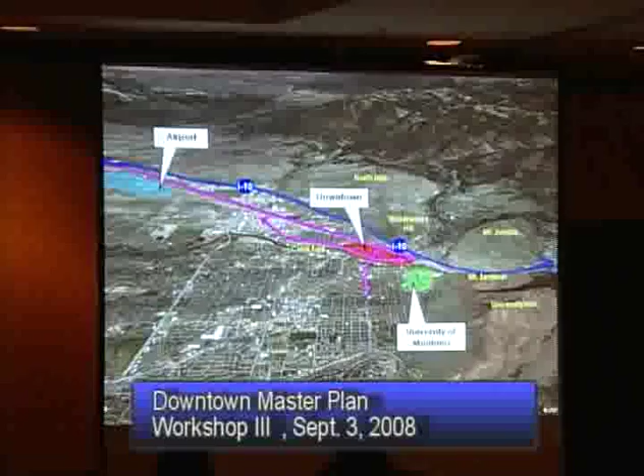The meeting purpose tonight is to look at plan refinements and get your thinking about those refinements. The agenda is pretty straightforward: the presentation and then the discussion. The discussion, I think, is the most interesting part of the meeting, and we will then have you fill out response sheets and make table reports as you've done before.

A reminder: the planning process has 3 steps - starting, designing, implementing - going from the general to the very specific. Looking at the schedule, here we are tonight looking at plan refinements. There will be one more meeting in November, where we'll be talking about the final master plan and the implementation strategy.

Our firm is out of Portland, Oregon. We're a small firm, and this is what we do, this is our specialty. We work around the country. We get good reviews and bad reviews, and we only save the good ones, and here they are.

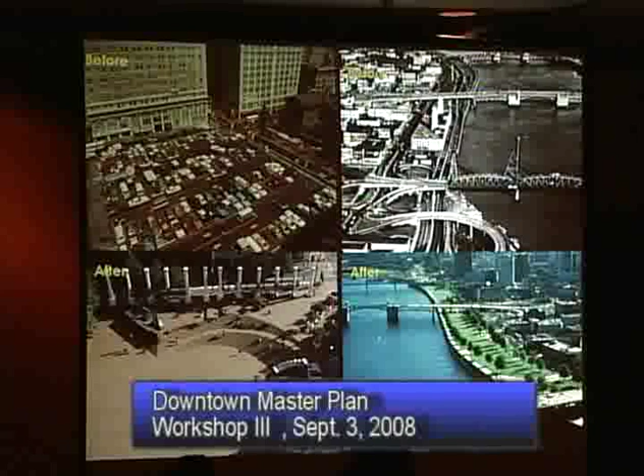So we've learned - we've had successes and we've had failures. On the left, a before and an after: a parking lot turned public square, and a waterfront that had a roadway which is now a waterfront park.

Meeting 1, the reminder: back in March, the question was - and many of you attended - what are your issues and concerns? Those issues and concerns are driving the process. For example, 70 people said maintain and expand a mix of retail.

41 said the next one, and you can see. So this informed us about what it was you wanted us to address, and that has been driving the planning process forward.

And then you can see some circulation alternatives, circulation issues as well. It doesn't mean that this prioritized the objectives - the ones with the most time mentioned are important, of course, but everything was important, and we're trying to address everything you mentioned.

Meeting 2 then was in May. At that time, we said here's some alternatives, and we asked, what about a retail hotspot? You filled out your response sheet, and you can see 186 yes, 3 no.

And how about open space? The Depot Square Roundhouse Park, as we called it, again a positive response. Festival waterfront, and a positive response as well.

Now, the reason these become important is that we want to know what everyone is thinking in the session. If something gets a negative vote, we take it off the table. Or if it's a 50-50, we know that maybe it ought to come off the table, or we need to do more work on it. So this informs us about where you are, because in the end, it's your plan.

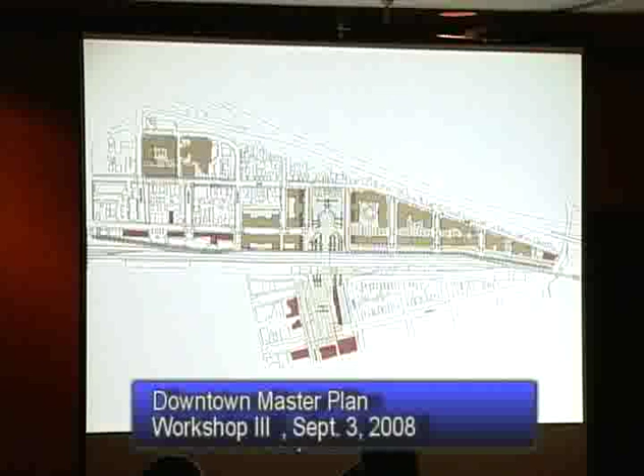As far as housing in the downtown, a neighborhood protection zone, again positive. Rail yard housing, if the rail yard should redevelop at some time in the future, again positive. That seems like a stretch, but there it is.

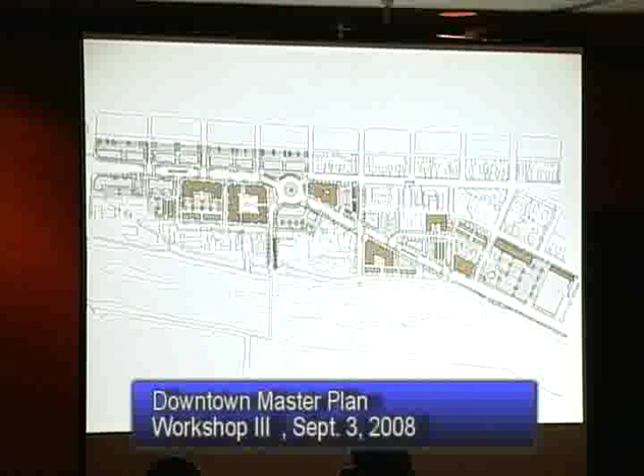Triangle housing - and of course you've been looking at the triangle for some time, with lots of good concepts, but we had some refinements, and you said yes on that. West Broadway housing, again a positive vote.

By the way, when we get a no, we take a look at the no's, and we also look at comments, because those sheets have places for comments. So you've informed us about many issues, or some of you had other suggestions, and we try to incorporate those. We take these very seriously.

As far as employment, the Triangle Employment Anchor, you said yes - it's up by the hospital. On the East Madison Employment Anchor, again a positive response, employment on the west, and employment in the middle at the government center, the consolidation of county and city functions. There was a positive response for that.

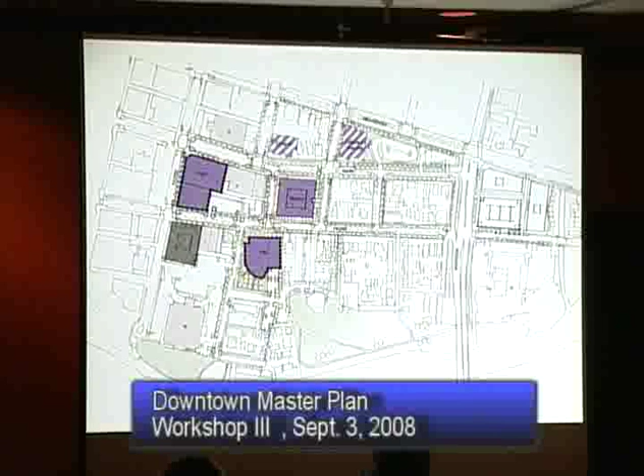As far as the cultural campus, we said perhaps there's a place for the Performing Arts Center down by the library off in front, and other cultural activities, and that received a positive response as well. But you had some questions about that.

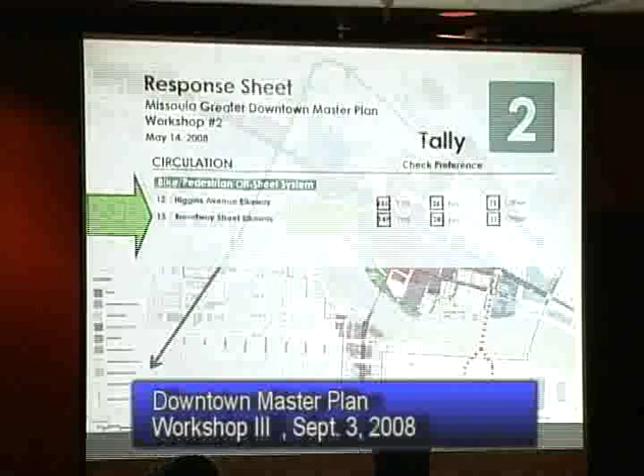Higgins and Broadway Bikeway had a positive response, as did Higgins and Broadway, so we carried those forward. We suggested a streetcar at a later phase running on rails in a fixed alignment with traffic, and generally you said yes, though there were some doubters. This is a long-term strategy, and since we've begun, energy costs have gone up, so it's starting to look even better.

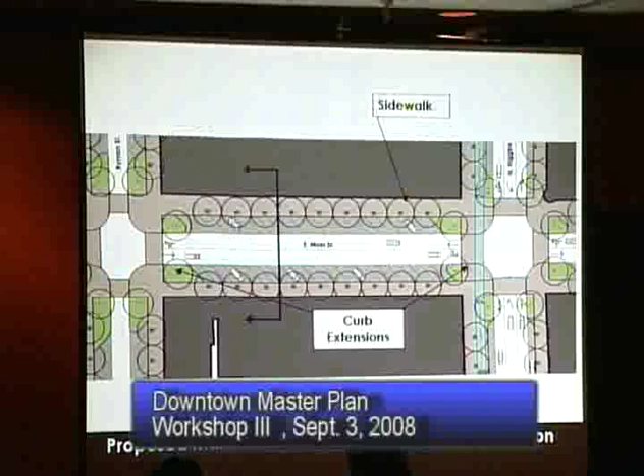As far as streetcar phase 2 running to the university, again not a lot of enthusiasm, but it received a positive vote. Making Main two-way from one-way was very positive, and Front two-way from one-way was also very positive. You've been talking about making them two-way for some time in the community, and this was just an affirmation of that.

So here we are at meeting number 3 with the refinements. We've taken your responses and comments, had discussions with your steering committee, technical advisory committee, and with your leadership, and out of that have come these refinements. So Don, do you want to talk about these refined alternatives?

So we're going to switch on and off to keep you awake here. Okay, Don, first of our tag team efforts here. So I'm going to start it out and do 30, 40 slides and give it back to George.

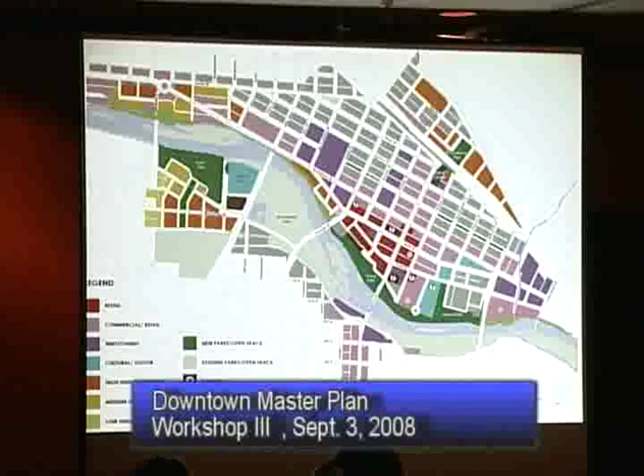When we did that, we were able to assess what that would be at build out. These may be abstract numbers for some of you, but I can say it is fairly consistent with your previous growth projections. Maybe not exactly, but we think it's still in the ballpark of what was anticipated.

For your downtown, for example, in your transportation plan. So the next question has to deal with retail specifically, the Macy's anchor and Pattee garage structure. Those are key components we heard last time to creating a healthy retail corridor. So we start with the retail hotspot, indicated by the yellow line from Broadway down towards the waterfront and over to Orange to Pattee.

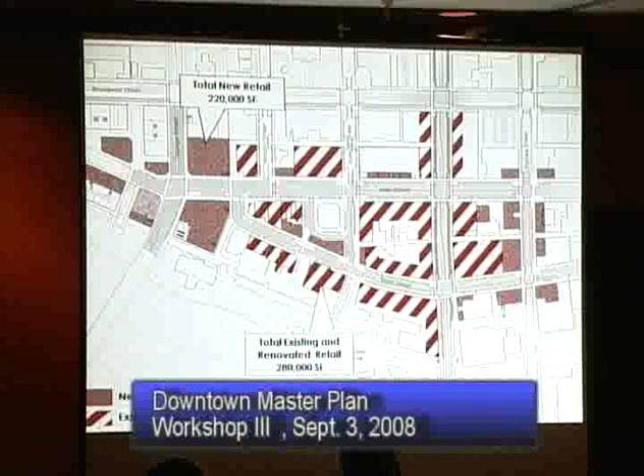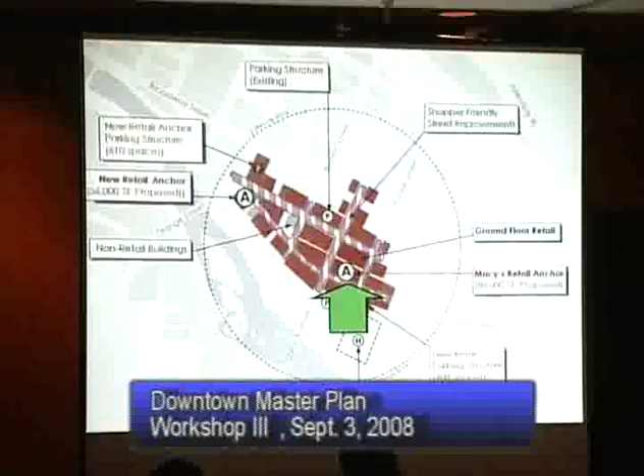We see Macy's, again, as the primary retail anchor, with the existing building expanded. Here's a before and after image of the site. You see some of those uses around Macy's, including the First Interstate Bank, a parking garage, and possible hotel. Here's a view looking south to north of what that might look like.

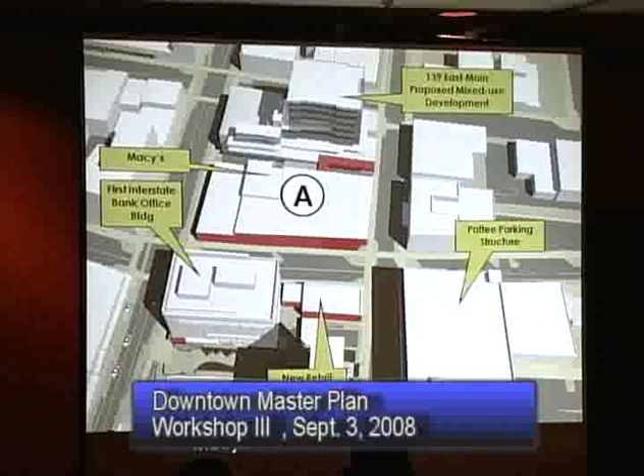On Main Street, the 139 East Main Street mixed-use project, the Macy's where you see the A, the half-constructed First Interstate Bank office building, and some new retail, all complemented by the Pattee parking structure on the lower right-hand corner. Looking at that in plan again, here are all those uses that I described.

Apologize about this. Here's what that was on the ground floor, and here's what that might look like on an upper floor. So you've got ground floor active uses along the streets, and above it you'd have a parking structure.

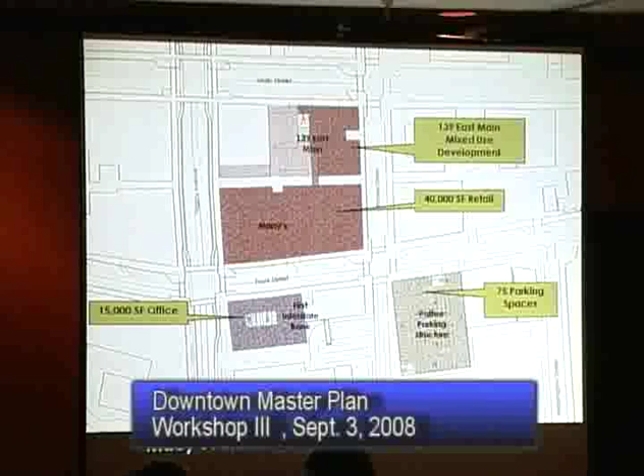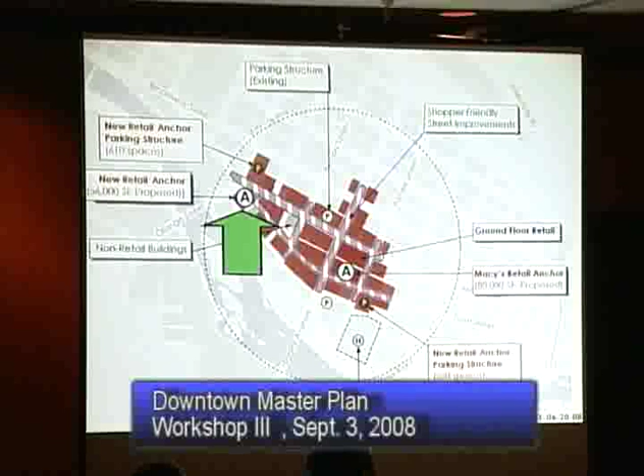Also within the retail hotspot, we're suggesting a second anchor at the intersection of Orange and Main Street, where you see that A on the lower corner. Here it is today. To do that, we're suggesting that Front Street would now tee in to Main, where you see that little dog leg. It would give us the ability to get a larger footprint and a larger floor plate to support that retail anchor.

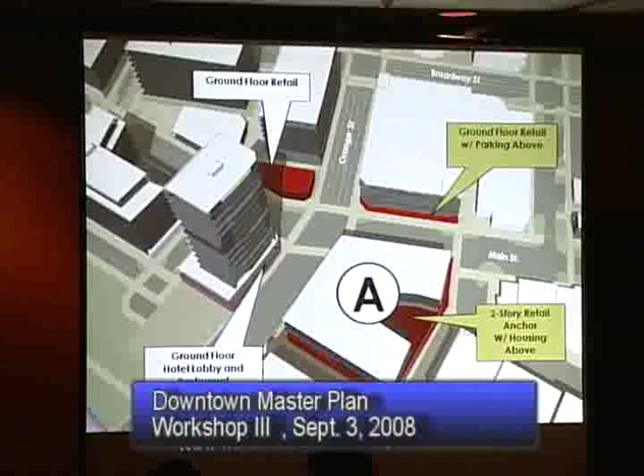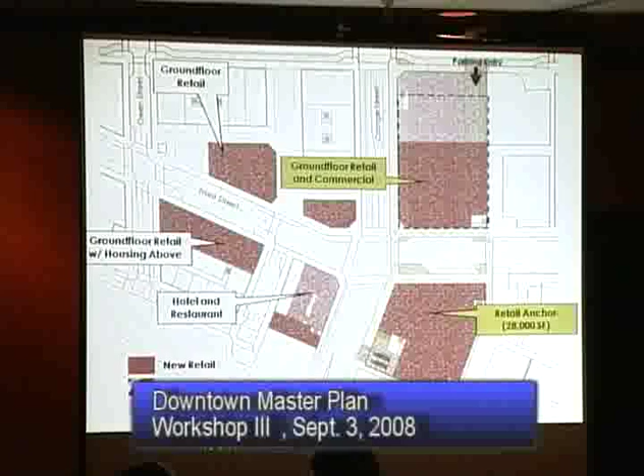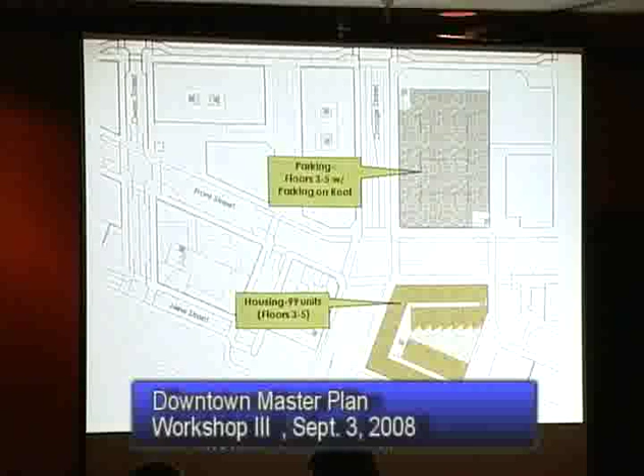Looking south to north again, up towards Orange Street, you see that area, with ground floor retail on these buildings indicated by red. A plan view of those uses, and also some of the retail that would be in the riverfront triangle area. We're seeing 28,000 square feet for that retail anchor on 2 floors, with the second floor again having the parking structure on the north side, and possibility of housing above that 2-story retail.

Next has to deal with open space, and there are 3 components of those. The first piece has to deal with the festival waterfront concept. We look at that as the area indicated by the yellow outline, extending from generally Orange Street over to Kiwanis Park, towards Adams and Jefferson, the streets to the other edge of Kiwanis Park.

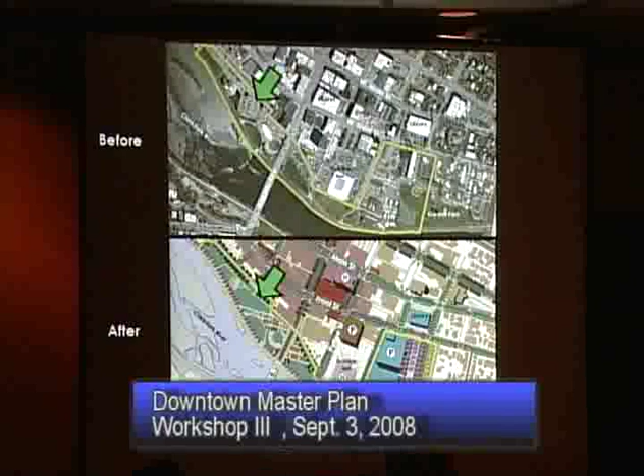The first piece of that has to deal with adjustments to Caras Park. Here's an aerial perspective concept looking south to north. The idea here is generally to try to capture some of the existing parking lot and convert that into park space. We've got a concept drawn here, but it would certainly need some additional refinement—the amount of paved area as opposed to green area might change as you refine the scheme.

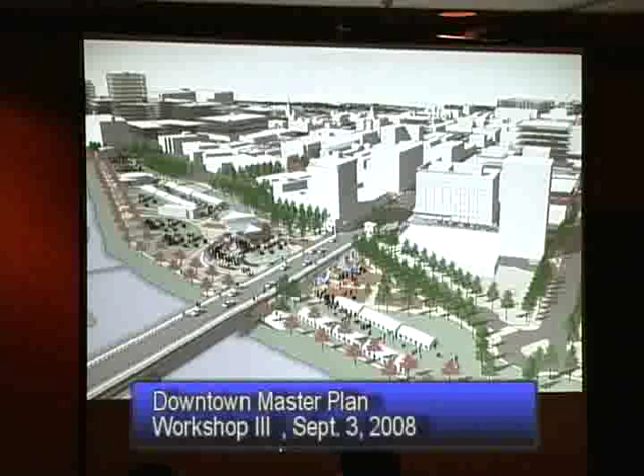So here's the expanded Caras Park, losing maybe a couple hundred spaces, but still maintaining at least 100 or more spaces within this area. It might be a place for functions such as fairs, where you see the tents and things along it. It might be a place for smaller concerts, or in the interim, it might just be open green space for informal recreation activities.

That parking that we would lose, we would hope it would be—and we're planning for it to be—replaced where you see the green arrow. That's generally located at the existing drive-through bank facility for First Interstate.

We'd also like to see better connection from Higgins Street, where we see the green arrows, and that would look something like this, looking from south towards north, a series of ramps and stairways. As you came by the Wilma, you'd have the opportunity to go down a stairway where you see the two towers, take a ramp, maybe walk halfway down, and take another stairway.

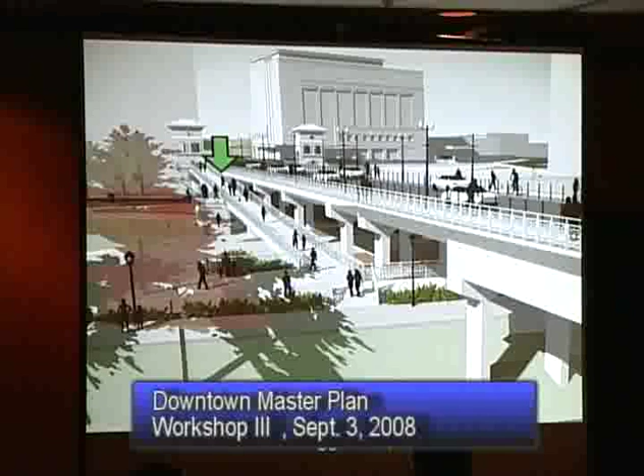Here it is looking at a side view towards the northeast. The waterfront is in the foreground. You can't quite see the water, but we're over the river. And here it is looking from the east towards the west. You see the Wilma in the background, and a double set of ramps on both sides of the bridge connecting to your waterfront trail.

That would be the first component of an overall idea of connecting back into the neighborhoods where you see the green arrows, up Pattee to the east towards Ryman, and then over towards Clay at minimum, with some additional connections over towards the library, which we'll talk about in just a little bit. So the idea is to extend some green fingers into the downtown so you have a better interaction and connection to the riverfront.

We're also suggesting providing a continuous waterfront trail. As you know, today it has fits and starts, and we'd like to see that amended and improved.

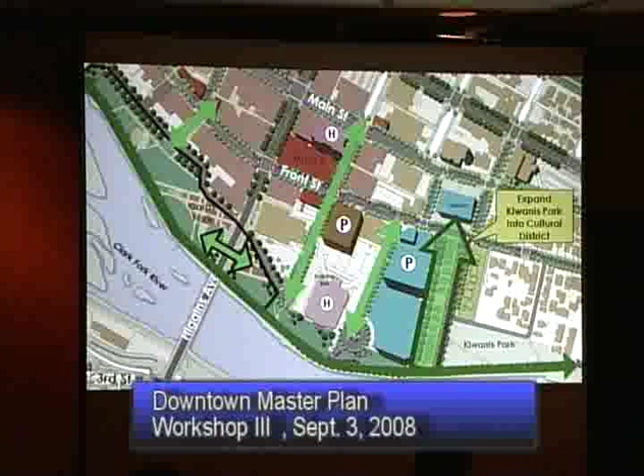We're also suggesting a festival waterfront concept that includes a new cultural district expansion, where you see that darker green arrow connecting up towards the library. This is what it looks like in perspective again. We'll talk about this as the notion that it might be a sculptural park.

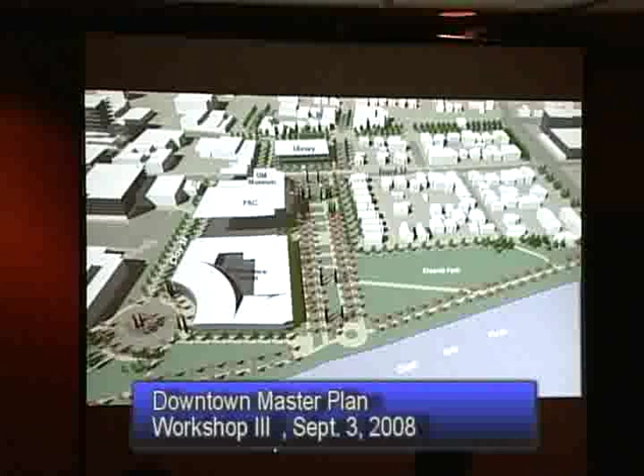Depot Square on the north end of Higgins, up by the train station, indicated here. The proposal is to remove the old Missoula building, infill development north of the Artcraft building, redevelopment of that, and a large area of mostly hardscape.

Looking south to north, reuse of some of the existing buildings, turn those into cafes. A significant piece of this is also providing a connection to the other side of the tracks.

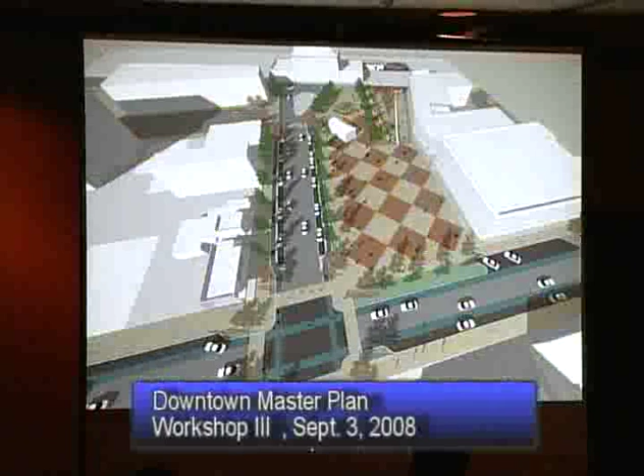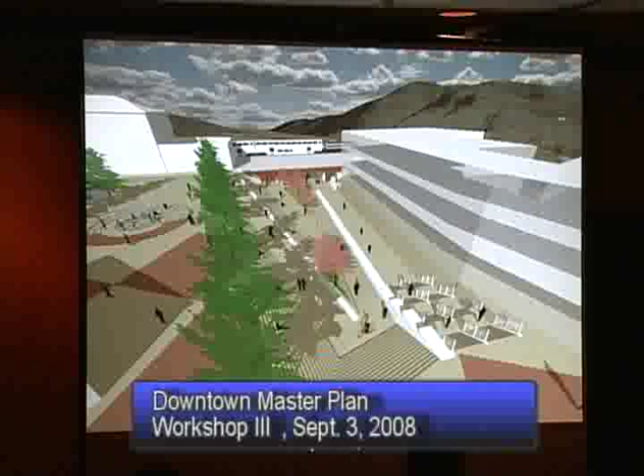A little bit of a close-up view of what this might be. A large area that is usable and interchangeable over time, so that's why we're proposing the paved area. The connection under the train tracks is illustrated here—wide and airy with good sight lines, active uses fronting onto that, gracious steps. You get a sense of what you're connecting to on the other side: a green space, an open space, a park, a neighborhood park.

Looking from the underpass here, again, light and airy, wide and comfortable, high enough for pedestrians, but not intended for automobile traffic—this is for peds and bikes only.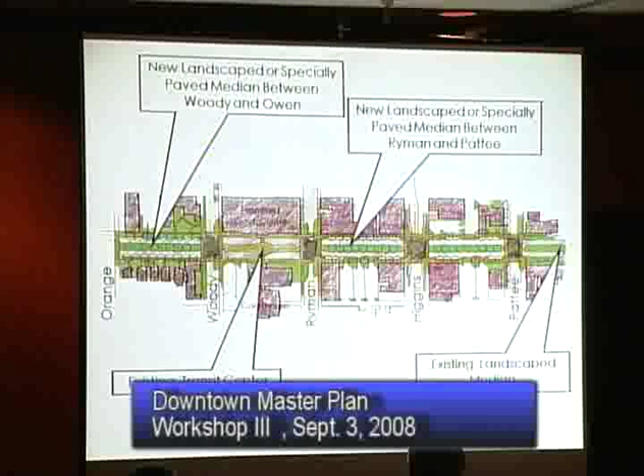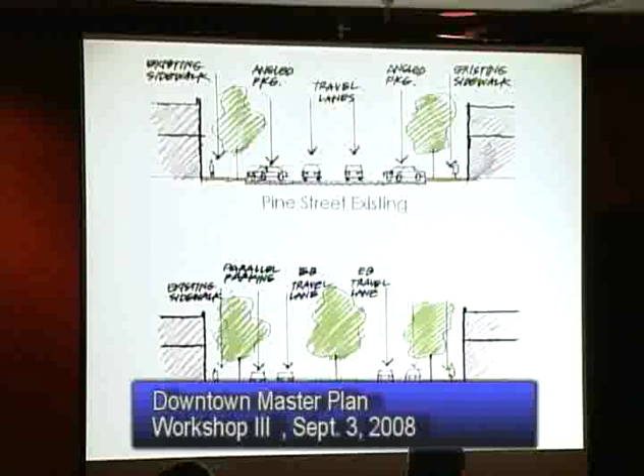This would require some changes to the parking configuration. Today's angled parking—to enable us to do this would require changing that angle to parallel parking. So it would be a slight loss of parking, but the sense is maybe this is an opportunity for additional green. There might be some other uses, it might be partially paved, and there might be some other community assets—art and other things—that might go in that greenway.

The next component is housing, starting with the triangle concept. I think it's a dynamite housing site, as we talked about before. Here's a detail of that, where you see largely the orange buildings fronting onto the river.

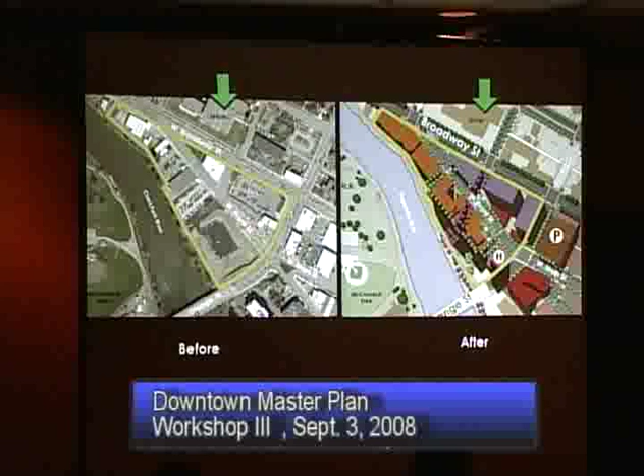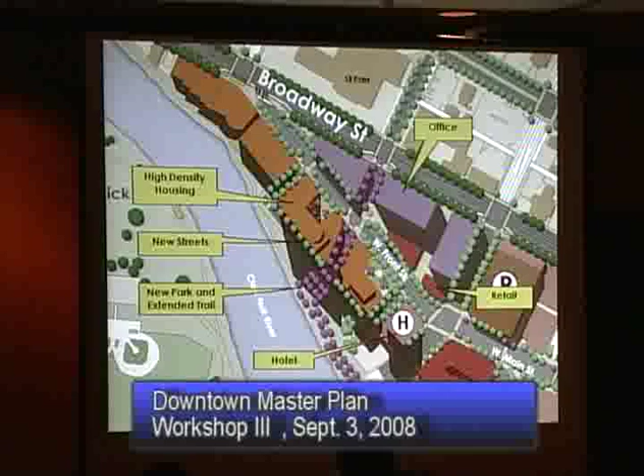High-density housing, some additional new streets, and some green space—a vital and important piece of creating a desirable housing neighborhood, and also a hotel that you see indicated on the corner of Orange and Front. All of these having active ground floor uses, so they would have retail or commercial ground floor component, and higher and possibly even bigger buildings.

We know that height is a sensitive issue. We'd like to make sure that we can put it where it has the least impact on existing residential neighborhoods, so you don't have buildings looming over from you. And we try to balance this and say, where are the good opportunities from a living standpoint. This is where we're suggesting maybe bigger buildings along the waterfront.

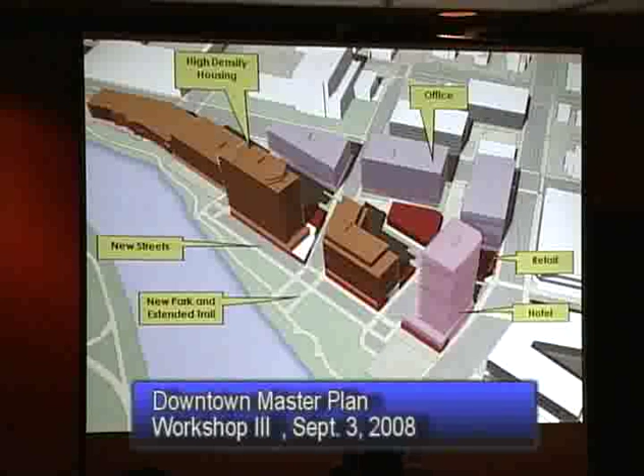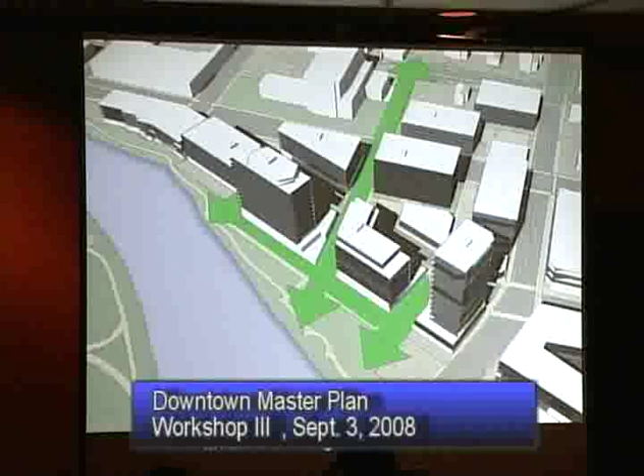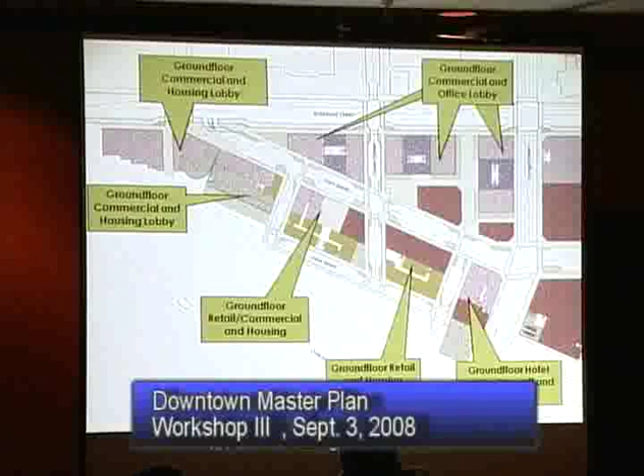It would be perforated so that they wouldn't be monolithic. There would be a series of streets and connections to the waterfront, highly pedestrian oriented. And the plan might look something like this: ground floor retail, housing, some commercial, all the housing above it, and the hotel meeting space and office for the block north of Front.

A key part of this is a transportation element at the intersection of Toole, California, and Broadway: a roundabout that will help deal with some of the traffic issues there, confusing traffic movements, and also an opportunity to establish a gateway—an opportunity for great gateway art and other things that I know you're looking at right now as part of some of your planning efforts in town.

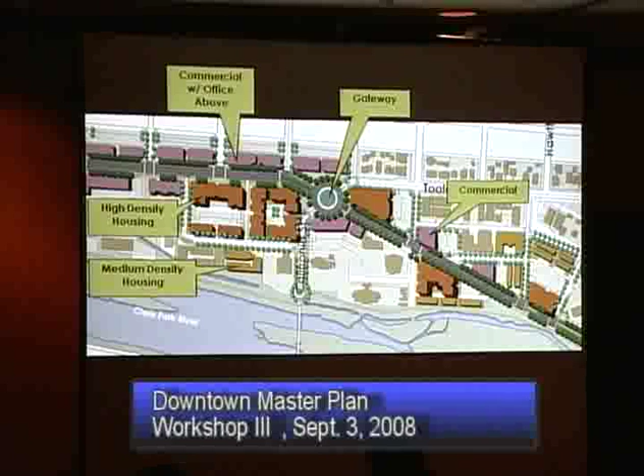So you see medium and high density housing. The next component is employment. The government center.

We all have been in agreement that it's important to keep the county facilities in the downtown. The proposal is to do a combined city and county facility, illustrated here, north of the transit center and the county courthouse. There would be a couple of floors of offices and parking integrated in the basement, and also a new parking structure on the south side of Alder Street, about two blocks away, indicated in brown.

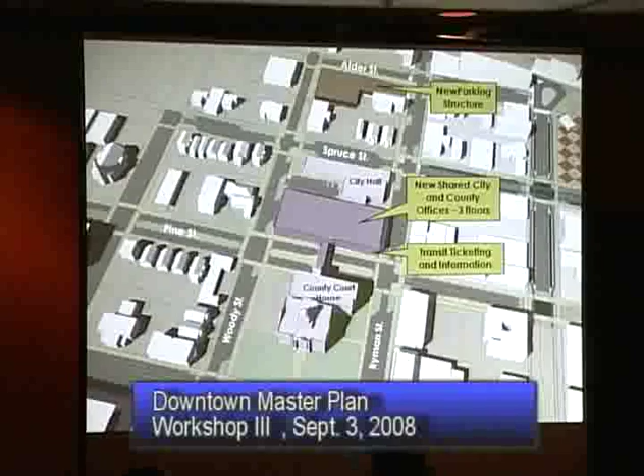And finally, we've got a question about the cultural visitor district. This one has changed a bit from the last time we came in and had the discussion with you, largely as a result of a lot of the comments we had in our meetings and also from the comment sheets. So what we know is that there was support for a cultural district, but you were a little bit lukewarm about the configuration.

So what this is identifying is a reorganization of the district that has more of a water orientation. One of the key components for consideration of building this long-term has to deal with some of the contributing historic buildings, indicated by the black squares. For this to move forward, we require the relocation of those buildings to the areas where you see the yellow squares on the right side of that sculptural garden park.

But it's not an essential first phase piece, and we'd say until those issues as far as historic buildings are resolved, that lower part along the waterfront really should be considered as a phase 2 project.

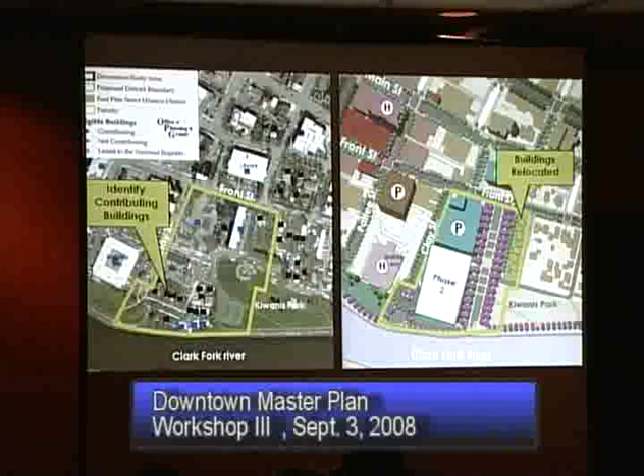So what would be in that cultural district? We see an opportunity for a shared University of Montana museum, the Performing Arts Center, and a conference center—lots of synergies that can take advantage of the possible new parking structure, its adjacency to the retail hotspot, and the waterfront and the greenway system. So those are the uses that are suggested.

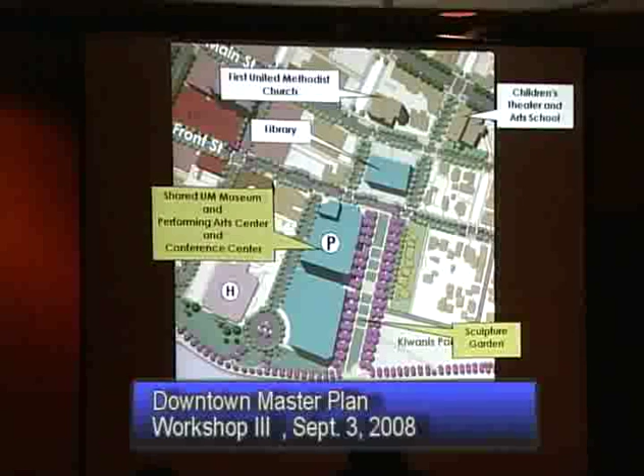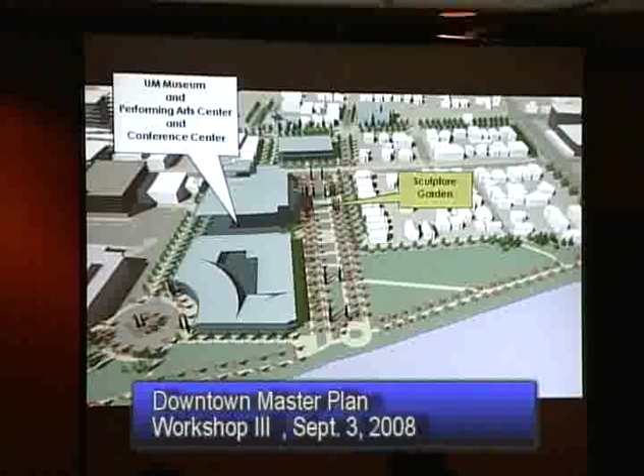We've looked at some of the previous programmatic issues as far as possible sites for the museum, the performing arts, and the conference center, and we believe it will all fit into this area. Looking at it in three dimensions from south to north, here's what that would look like. The sculptural garden could be very serious, or it could be as playful as some of these sorts of elements. I think all of that would be determined at a later date.

Okay, so I'm going to pass this on to George, and he's going to talk a little bit about circulation elements. Thank you.

We're going to run a little test here. We've got the projector we're using over on Jason's side has some color distortion in it. So we're going to put another projector up here, and Jason's going to see how quickly he can do this. So it's a chance for a little comic relief, I think. We'll just watch and see how he does here.

The colors are extremely important on these graphics simply because we use the colors to differentiate between different uses, and if the colors tend to be a little bit muddy or move together, it's certainly harder to communicate. As I was standing in the back of the room, I could tell that the screen on the far left was easier to understand than the one on the right. So we thought we'd try out a new projector, even though we're getting this kind of on and off performance.

I'm taking the circulation framework piece simply because we are going to start off by talking about bicycles in your downtown. And we're also going to talk very quickly about sustainability. I'm often asked about sustainability and what that means, and of course it means different things to different people. So we're trying to be very specific tonight. We've done a lot of work in the area, we kind of know what produces results and what doesn't, and so we're going to be making a suggestion tonight that we think has the potential to save a considerable amount of energy in your community. So, Jason, give me a high sign when you're ready, and we'll get going.

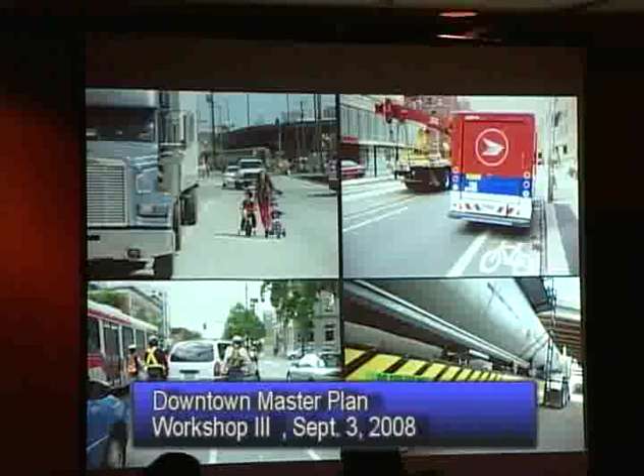The reason you have the safety conflict is that big vehicles really don't mix with the public. Even in bike lanes you have trucks pulling into them, cars disrupting bike lanes, and in many cases it's hard for big trucks to see bikes, so you need these kinds of warnings. You see these kinds of signs sometimes, which is really unfortunate, and these are the kinds of things that show up in cities.

All unfortunate. Now, we can look at other countries for some guidance. In the Netherlands, there are two university towns, one Utrecht and the other Wageningen, at 33,000 people. Utrecht has 288,000. So we were interested in how they did it and why they had this kind of bike ridership. A lot of research has been done, and this comes out of that research.

So, a couple of weeks ago, I spent 3 days in Utrecht, Netherlands. I said, we can't bring this to you without having a better sense of how these things work. So I worked it into something else I was doing, and I rode the systems. The reason they work is they have protected bike lanes. They are off the street.

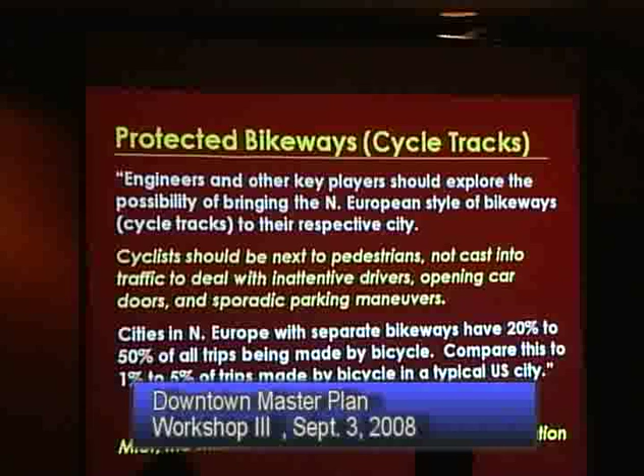Now, MIST, your Missoula Institute for Sustainable Transportation, has addressed this. They are, as they should be, skeptical of protected bike lanes, but this comes from their website and their policy statement: cyclists should be next to pedestrians, not cast into traffic to deal with inattentive drivers opening car doors and sporadic parking maneuvers. And we all know that - I mean, that's just common sense, but there it is.

So when we look at these great bike systems, they have these characteristics. Spatially, the communities are fairly dense, fairly compact, and the terrain is flat. Your terrain is flat, so I was interested in the density you would find, and here we are in Utrecht - pretty low density out in the suburban areas, and here are the protected systems off the road. In town, the density was a little higher, but not all that much higher than what you have here.

As far as the weather, obviously it's a big issue. Rain and temperature are the two things, and you find that in the Netherlands they get a lot of rain, and there you are - they just put up an umbrella and away they go. The weather is not as severe as your weather, but you have many days in a year when I understand you ride. Competition for other modes and auto availability is always an issue - in other words, how convenient is it for you to drive an auto, and are there other transit modes?

That might reduce bicycle use, but in fact, in those situations—this happens to be in Utrecht again—an exclusive busway, and they also have streetcars or light rail. You find that they still get high bicycle use. This is the big one: policy.

All of the places that have high bicycle use around the world have a bike plan. It's not an accident. There is a very specific, deliberate bike plan that is adopted. Safety is always the big concern, and public support. These things don't happen without public support. The public has to believe that this is a good thing and they want it, so decision makers can move ahead. But safety is the big issue in the bike plans.

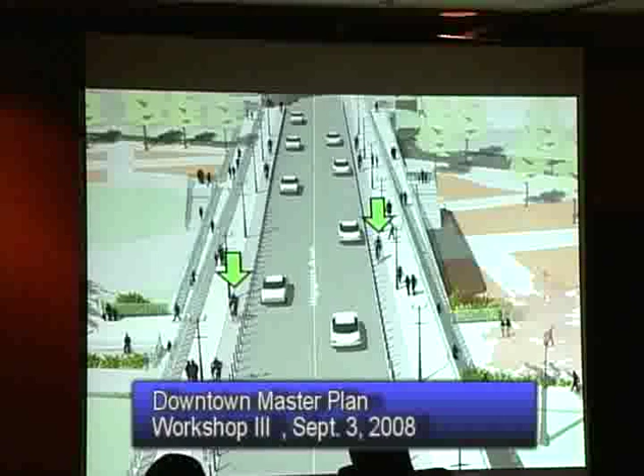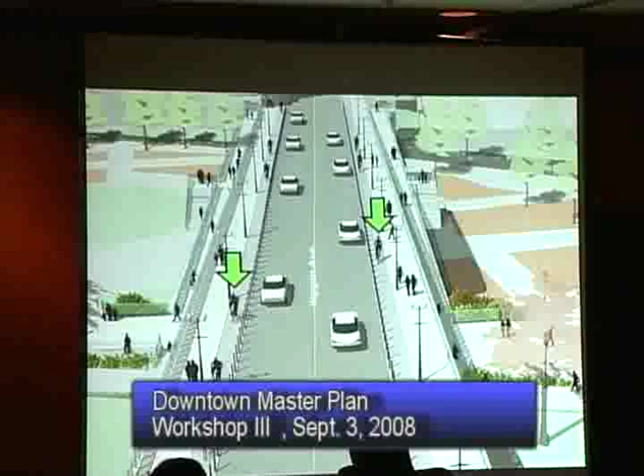It's currently 66 feet. The idea is to expand the pedestrian and bike zone from about 5 feet for peds today and 5 feet for bikes to about 15 feet. So we've got 9 feet for pedestrians along the bridge. We know there's a strong desire for more of a strolling environment on the bridge. It offers a great opportunity for viewing. Also, the ideas we previously showed with the ramping coming down to the park would play in well to this idea, increasing additional area for the pedestrian. So those are the two options for that.

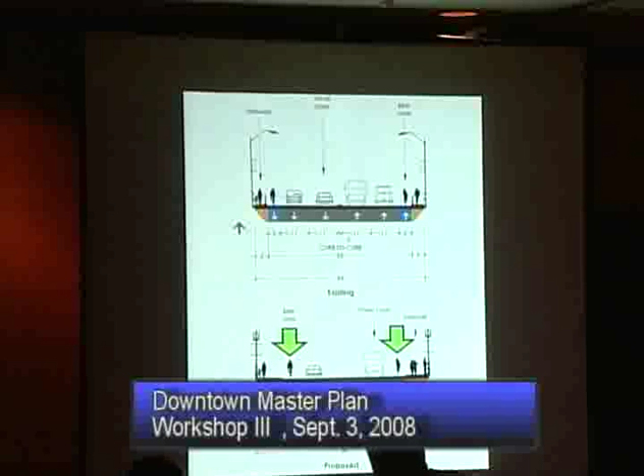And then the standard is very similar. It's just you're in the street rather than on the sidewalk, essentially. So the same dimensions, just a slightly different treatment of the surface, and its relationship to the traffic lane.

Down in the hip strip, the question is, how do you then transition further to the south? We know the proposal is to run these protected bike lanes or standard bike lanes at least down to 4th Street, and then at that point we'd make a transition to either existing or planned bike lanes on 4th Street that feed into the neighborhood east-west, and also a connection at a realigned intersection of 3rd Street down to the waterfront.

Currently you don't have that movement at a T intersection at 3rd. We think this helps provide better pedestrian access, provides an opportunity for maybe a mini plaza at that intersection, and simplifies the bike turning movements. We'd hope we could warrant a traffic signal also in this location, if possible.

So what would that look like on the south side when we go into the proposed protected bike lanes? You see it illustrated here today. It's 12-foot sidewalks - we wouldn't narrow those. We would maintain all the existing on-street parking, and then just add the bike lane and that transition sidewalk between the parking and the bike lane, the 3-foot piece. So you can see how it fits in there.

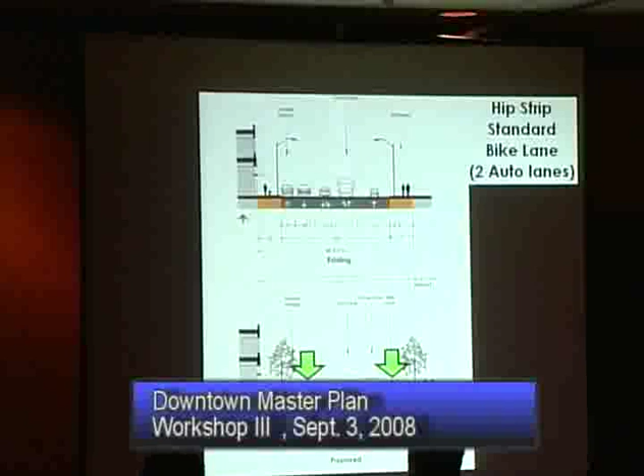And so the next piece has to do with Broadway. If you remember last time, we talked about a two-directional, one-side bicycle facility for both Broadway and Higgins. We're maintaining that two-directional piece on Broadway. Part of the rationale is that, as you know, east of Orange Street, there's a limited amount of right-of-way.

Actually, I guess it's beyond Orange Street - it's about McCormick, where it ties into the Riverfront Park. You're constrained for space, and there's actually a point there where your Riverfront Trail blends into this. So the idea is to be seamless and keep the two-directional trail continuing all the way over to Van Buren and connect at that location on the south side of the street. There are advantages to doing that simply because there are fewer curb cuts, less interactions, and frankly, it's probably the more common approach in other cities around the world where they do protected bike lanes.

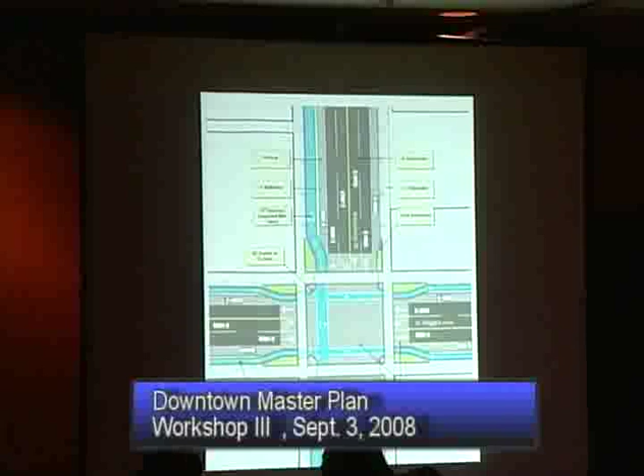So this drawing's a little bit tweaked - the north is to the right. Broadway is going up and down, so you get to see how that's done. So you get two-directional, a little bit wider - it's 10 feet wide instead of 5 feet. And there would be a stripe in the middle of it, and the same sort of traffic signals for automobiles and bicycles as part of that system, the tabled intersections.

Again, all on the south side. The existing right-of-way is generally about 98 feet through your downtown to Orange, and between Orange and Van Buren, as illustrated here. The idea is that you would require some narrowing of your sidewalks down to about 12 feet from 16 to get this bike lane on the side.

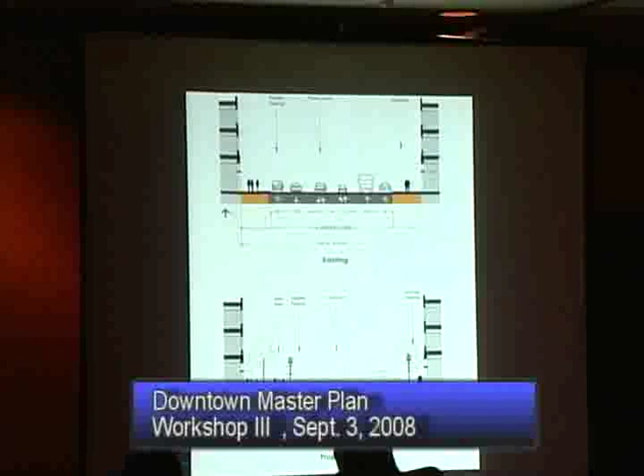So it does impact that a little bit, but we haven't hit the point where we think it's significant to the pedestrian environment. If it was 10 or 8, we'd really be worried about it, but at 12 we still feel pretty comfortable. You get street trees, street furniture, benches and other things, and it's still very viable.

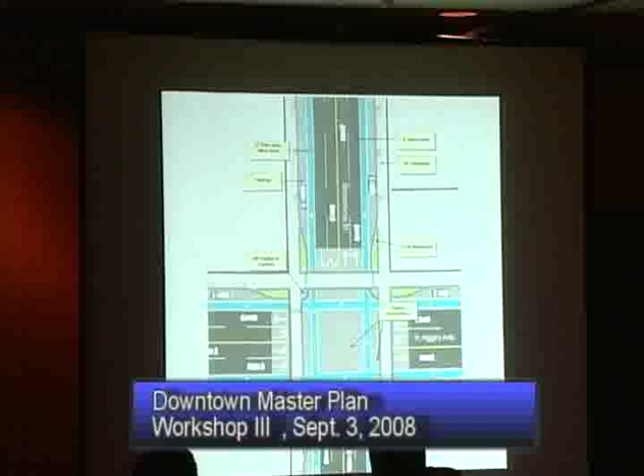The standard bikeway would be planned with the lanes on street at 5 feet, not 6 or 8 — they get a little narrower here simply because of the constraint in roadway capacity. Like the protected bike lanes, the sidewalks would be required to be narrowed from 16 feet down to 14. So they're a little wider, but not significantly wider, 2 feet wider if you do the standard bike lane. If you were to go to 6, it would actually be equal rather than the 5. So a little jumpy again here.

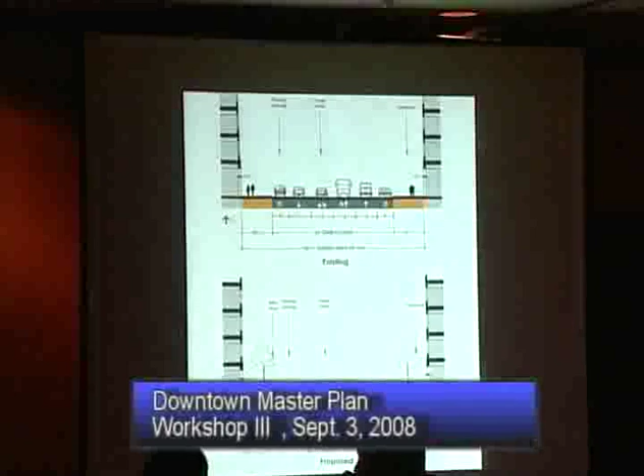So that's the bike piece. We spent a considerable amount of time on that because it was an issue we had a lot of conversation and a lot of comments from you too.

So from a pedestrian and bike standpoint, we'd like to see some connections on the riverfront. As you know, there are some disconnections on that — you see the yellow pieces illustrated here. We'd like to see those gaps filled in. I think you're all aware of that.

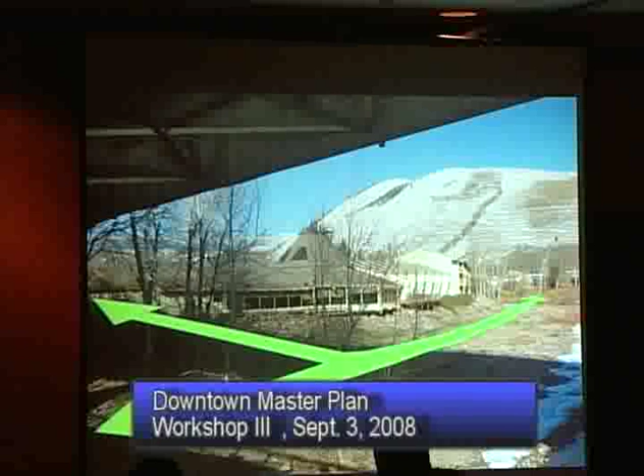We would require some sort of land acquisition or easement to come through these areas. Some of these areas may be more difficult than others. The first step is to get it as part of an adopted plan and make sure there's a concept for it. Some of the areas in particular are illustrated here over by the Madison Street Bridge, connecting over towards Van Buren, by the hotel.

We'd like to see some improvements to the neighborhoods. You've already got bike crossings on some of your streets, integrating the north to the south side along the railroad tracks, and some of the other planned areas where you've already been having discussions. We want to make sure those are thought about and connected as part of the downtown plan.

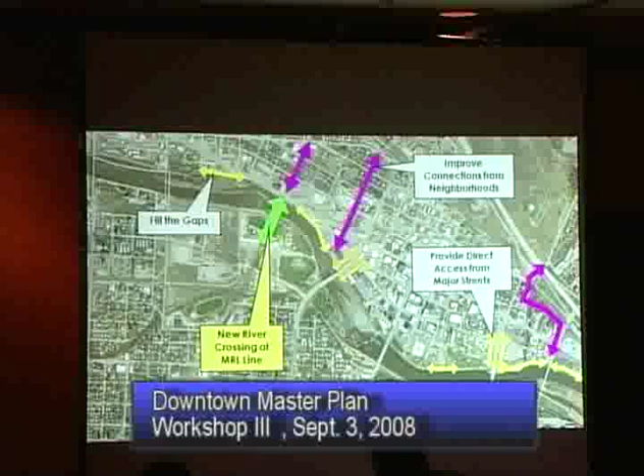We'd also like to see a new river crossing across the MRL line along that railway. You guys have been pretty good at doing these sorts of river crossings — here's your next challenge, I think, to do that and connect to the south side here. And then we've got implementation, and I'm going to hand it back to George.

We're just about finished, but we're often asked, how do you move ahead with the plan, and where do you get the money? That's really the next phase we're going to take a look at, but we can give you a little preview here. In other words, you can't do everything all at once — you try and pick the half dozen projects that are most important, the ones you can implement in a hurry that will create momentum.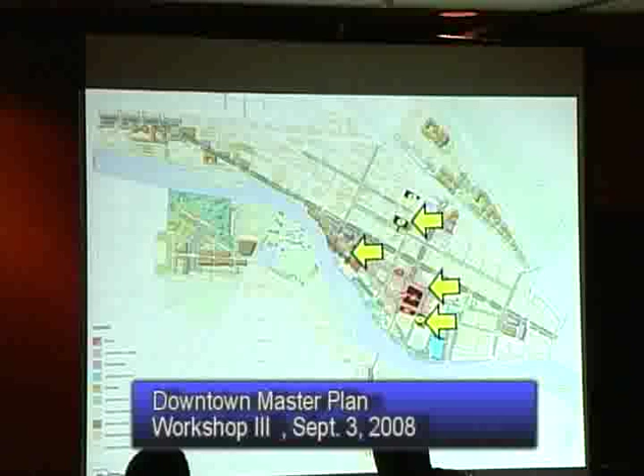The last thing is a special design district. We've said you've got districts in your downtown area, and this can certainly be refined. Many of these contain important historical traditional neighborhoods, and these are some of the issues in those neighborhoods. How do you maintain historic character when you have all this wonderful historic fabric in your community, and you're getting some new buildings in, which may not be compatible with what you already have?

The solution, we're saying, is new downtown zoning districts in those areas that are very clear about permitted uses, and that also have design standards for new development, with design guidelines created for those districts. You have fundamental design guidelines for the whole downtown which define your value system and what you'd like to see, and then district design guidelines, because not every area is identical, and some have rather unique features that need to be protected.

We need to make some suggestions about how you can formalize that review process. You already have a planning board. They would look at uses, standards, and regulations, and your design review board would deal with design guidelines, and we'd make some suggestions about how that process should work.